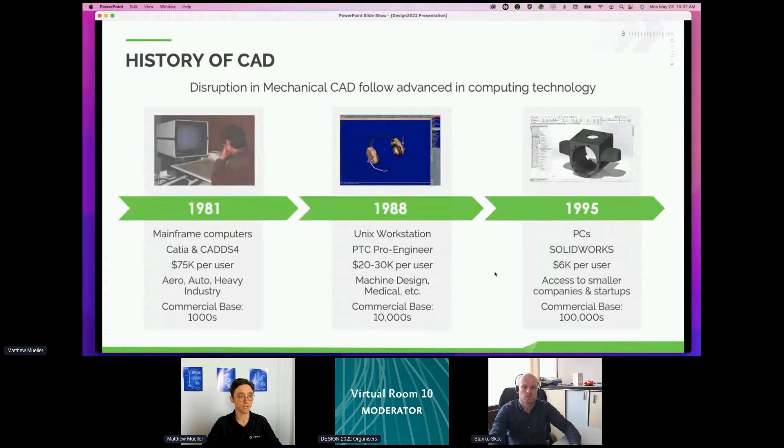But what Onshape is doing is planting a flag in the ground, saying this is the fourth tech disruption. Onshape was founded in 2012, first publicly released in 2015, following the new advance in the availability of cloud computing.

Onshape has lowered the cost significantly in how available CAD is and made it useful for everyone, students, engineers, and development teams that go beyond just engineers, marketing, all different aspects, different members of the development team can now have access to CAD. It's expanded the commercial base by an order of magnitude. We have almost 2 million just teachers and students using Onshape, which is a pretty staggering fact.

So in order to understand how Onshape is fundamentally different, I like to give a little peek under the hood. I'm going to get a little bit technical, but hopefully just to show what is different.

Traditionally, with the state of CAD today, each application is downloaded on a powerful workstation, and you need a computer with certain minimum specifications to be able to run the graphics and do all the processing. And when collaborating with a team of engineers or developers, you have to figure out some way of coordinating each of the files that you're working on with the CADs.

Typically there's some central file system that you have to check in and check out files as each person is working on them. We're seeing a movement in the industry where these traditional CAD companies are adding a cloud component to it. There's a couple of ways that we're seeing cloud-enabled CAD come to market.

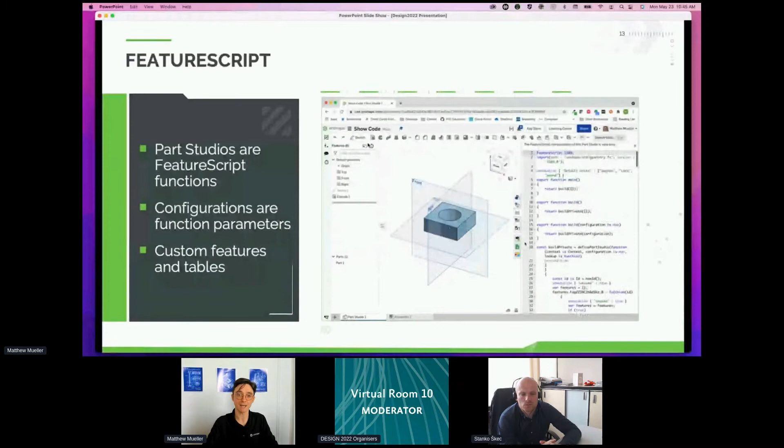So unlike other CAD systems where you can create macros, which are essentially recording a series of features in a row, you can create your own feature that is a first-class citizen in Onshape and works exactly the same as a sketch, extrude. And actually the library of FeatureScript code that defines these standard functions you see in the toolbar is fully open source, MIT licensed. Anyone can open that document and create their own customized version of an extrude to optimize their workflows.

So because of these core architectural decisions, Onshape has product data management, or PDM, innately built into the platform. You can link documents, you can link parts and geometries from one document to another without worrying about files. You don't have to worry about having the right updated version of your CAD application and, oh, the file was saved in an old version, has to be updated. All of the parts are just data in the cloud and can be seamlessly linked in very flexible, extensible ways.

You have role-based permissions that can be changed in real time, and you can limit those based on what the use case is to protect intellectual property or create open source designs that anyone can collaborate on. And then we also have release management built in directly to the Onshape platform. So these are some of the kinds of practices that are important for students to understand and have competencies in when they're going into industry.

And in the past with other systems, the technology just got in the way. It was so hard for students to actually engage in a release management workflow, but now it's just built into Onshape and it just works. The technology gets out of the way.

Another huge opportunity, and we're not going to go too into this unless there's questions at the end, is the Onshape REST API. So for those unfamiliar, REST API stands for Representational State Transfer Application Programming Interface. And this is a wide standard that's used by almost any cloud-connected device these days. And it allows you to access Onshape's engine, the geometry server, the modeling server, directly with any computational workflow.

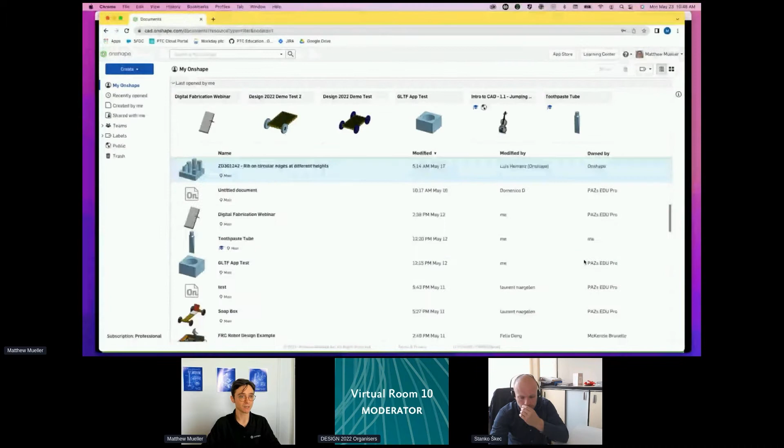And then I'll show configurations, another piece of CAD modeling, which is a very important competency, but traditionally has been very difficult for students to engage with because technology gets in the way. So with that, I will hop over into Onshape. So here I am in Onshape. This is what it looks like when you sign into cad.onshape.com.

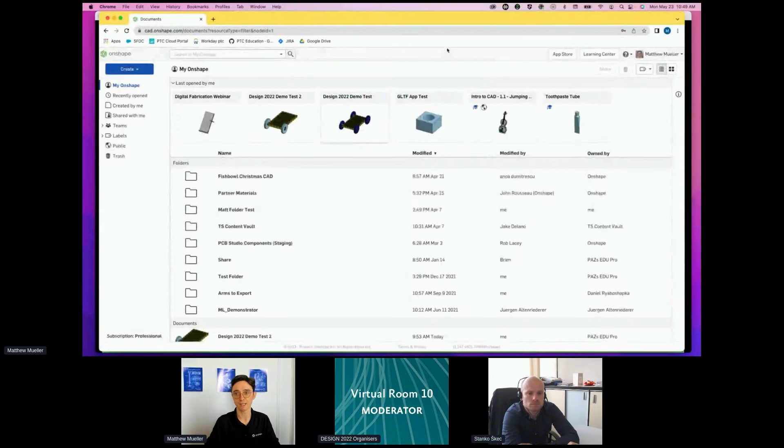And here in the top left, I can click create and create a new document. So Onshape is a little bit different in that you don't create a file, you create a document, and all of your design elements can live within one document. So I'll call this Design 2022 Lego Truck. And that's what we're going to be making, a Lego truck, because we only have 15 minutes, and hopefully you can extrapolate with the basic concepts here into how you can use Onshape to make a real truck if you had more than 15 minutes.

So when you create a new document, you start with a part studio where you model your parts with a feature list, and then you have an assembly. So traditionally you start by modeling parts, but here I'm actually going to start right in an assembly. And I'm going to insert some parts. So I'll start by inserting. You'll see the first thing that shows up is my current document. I don't have any parts in my current document, but I can actually go to other documents.

And here we can see I can pull a part from any other documents I have in my Onshape, or I can come down and click public, and I can pull a part from any public document that anyone in the Onshape community has shared. So I'll search for Lego Spike Prime, and I'll see all of these documents that have been created. This one is the main one I usually pull from, and I can see there's these full robot assemblies that I can directly import into my new document, or I can come over to Part Studios, and here I will take this big Lego build plate, and I'll add that. That will be kind of the main chassis of our Lego truck.

Now, this is a big document, so it might take a few seconds to load, but that's pretty standard, even if you have an installed CAD application, that it takes a little while sometimes for the program to think. And of course, as I'm sharing my screen and streaming a video call, it can take a little bit longer with the bandwidth.

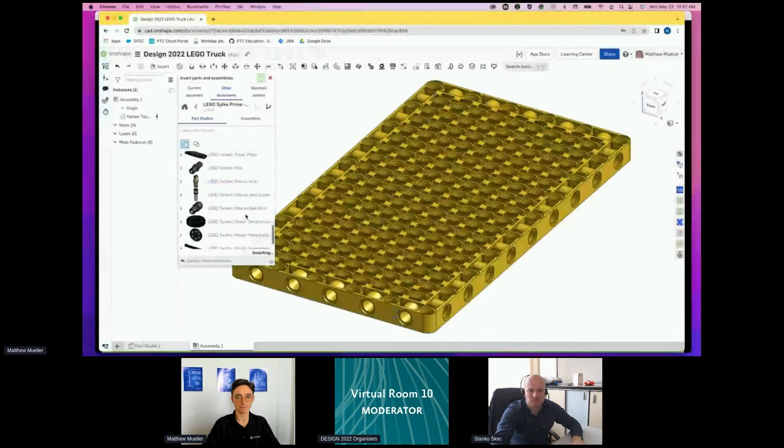There we go. So there's the chassis of my Lego truck, and I can click check to insert that. And once it commits, there we go. So there's the chassis of my Lego truck. And once it's loaded, it's loaded. So now I have a very responsive interface that I can move around and work with freely.

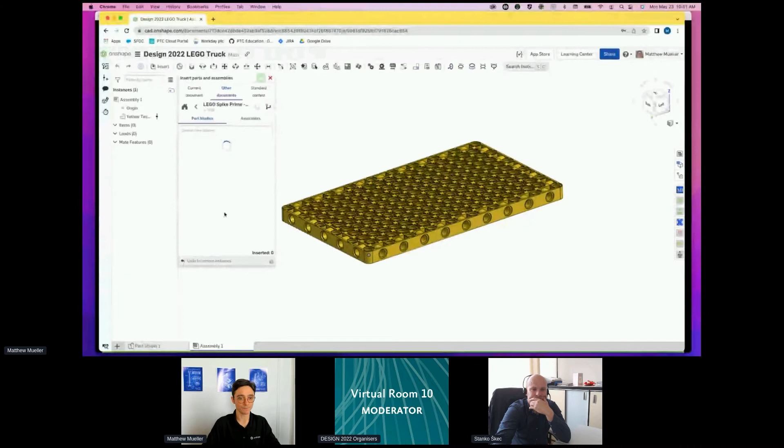So I'm going to import a couple other parts from that document. I'm going to import a peg that I can add a wheel to. So here I'll come down and find the peg here. So I'll take this Technic pin with axle, and I'll insert that into the assembly. There we go. And then I'll insert one more part at the same time.

And this document, the creator did a great job of creating the full set of Spike Prime parts in this one document. And we're seeing FIRST robotics teams take a lot of advantage of this in designing their Vex robots or other types of robots in real time. So here I'll take this white wheel, I'll insert it, and there we go.

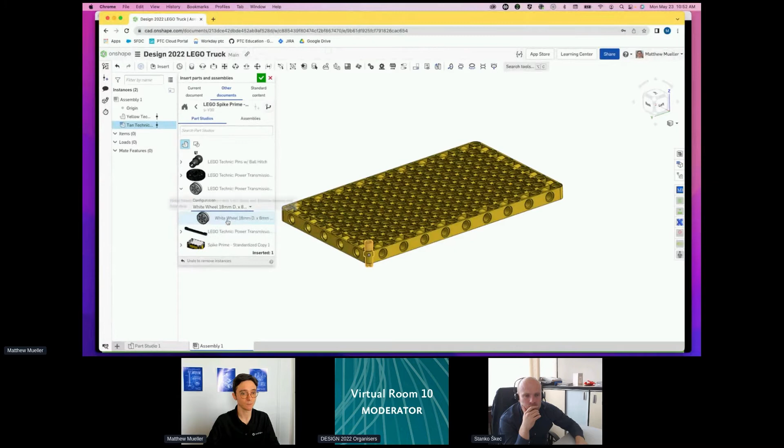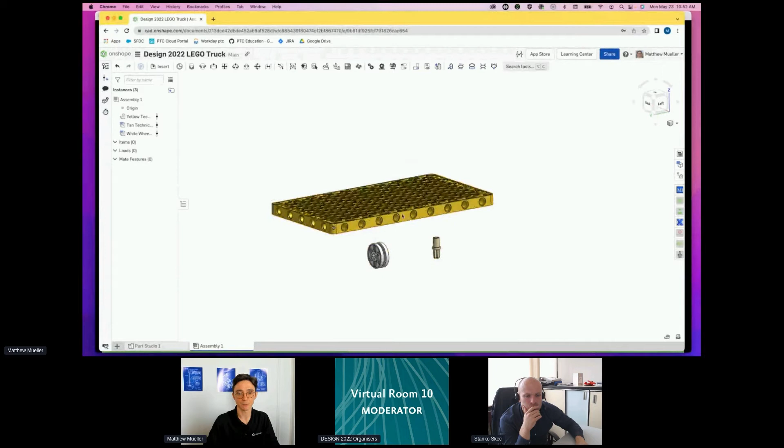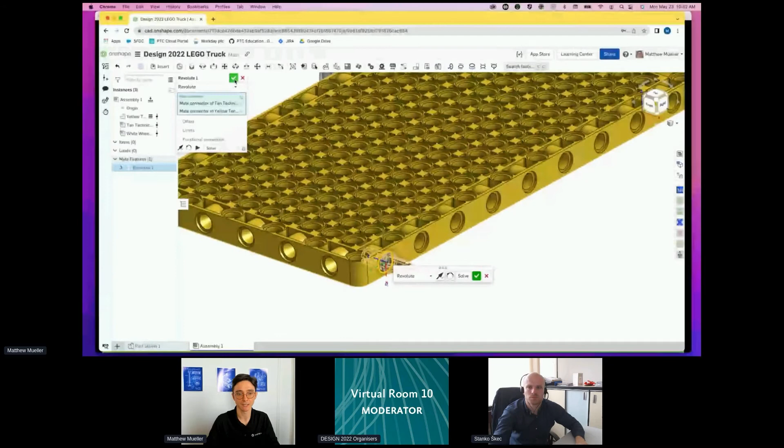Okay, so now I have my 3 parts that will be the start of my design. Maybe I will start by fixing my chassis so it will stay in one place. And then I can start using these mate connectors to create my assembly. So I will create a revolute mate between that pin and here. I'll make sure it's oriented in the correct way. And I'll click check. So now we have my pin in the correct place. Hopefully everyone's played a little bit with Legos and knows the general idea of how Lego works.

Now we can fasten this wheel onto the axle here. Again, we'll make sure it's pointing in the correct direction and click check. So there we go. We have the start of our Lego truck here. Now, again, I've not modeled anything from scratch in this Onshape document. I've only been pulling from other places.

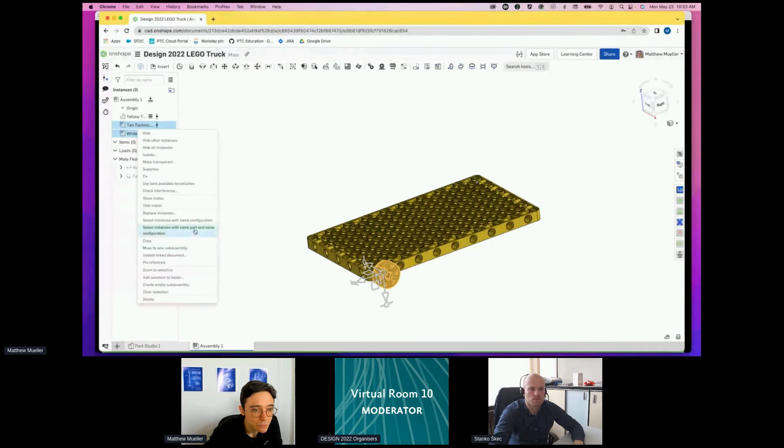But what I can do, because I know I'm going to want to make more than one of these wheels, is I can right-click on these 2 parts, and I can create a new subassembly from these 2 parts. And move to new subassembly. So there we go. We see them collapse in here, and we see this new assembly appeared in my document. So you can have as many assemblies or part studios as you want within one document. And again, you can seamlessly link these part data between documents, which is a really powerful way of modeling.

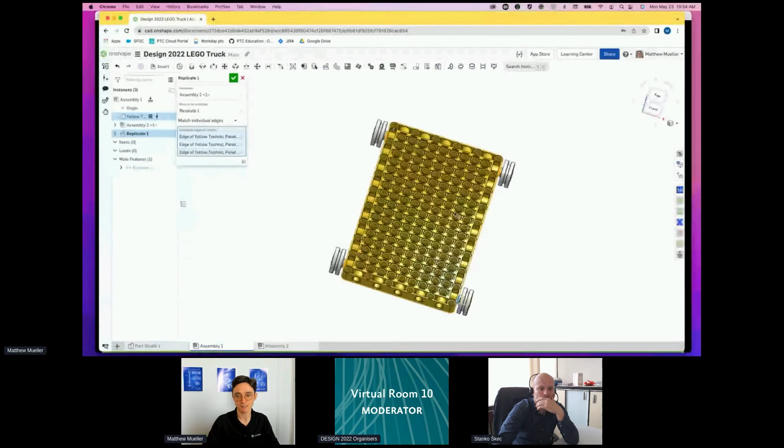So now let's make sure that we have 4 wheels so I can replicate this assembly instance. And I will select match individual edges, and I can click the 4 edges on the corners of this chassis here. And there I have my 4 wheels. So we have the start of a car. And now what's a car without tires, right? So now we can get into the fun part, which is actually creating a model.

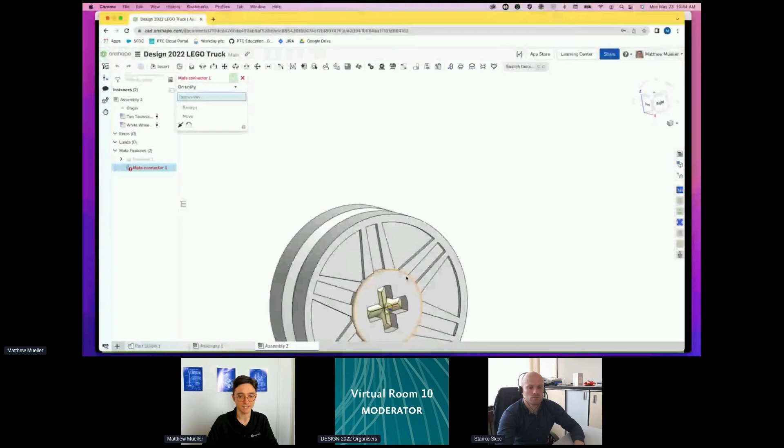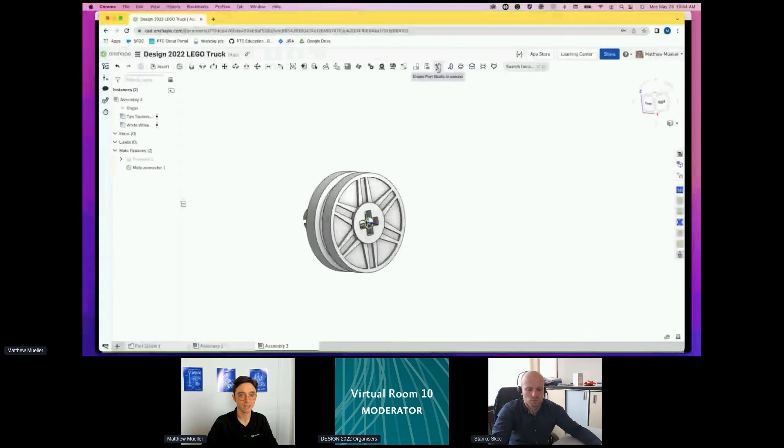And one of the very exciting things that Onshape allows is you to model in context. So I want to create a tire for this wheel in particular. So why not create it in the context of this assembly? So I created this mate connector, which will be the origin of my tire. So now I can select create part studio in context. It asks me to select the origin mate connector for my new part studio. So I'll select that mate connector here.

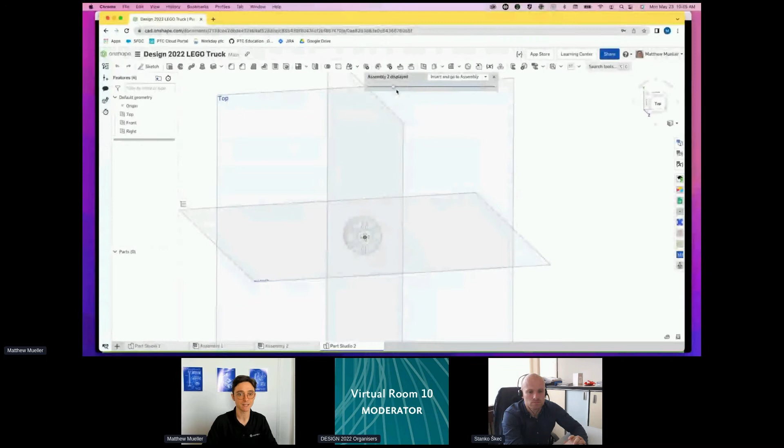And when I click check, again, we see a new part studio has just appeared in my document, all within this same container. So now we see there's this kind of translucent assembly in the background. I see assembly 2 is displayed, and I can change that transparency if I want. But this is a brand new part studio, no features. So as with all CAD, we start with a sketch. I'll create it on the top plane, go normal.

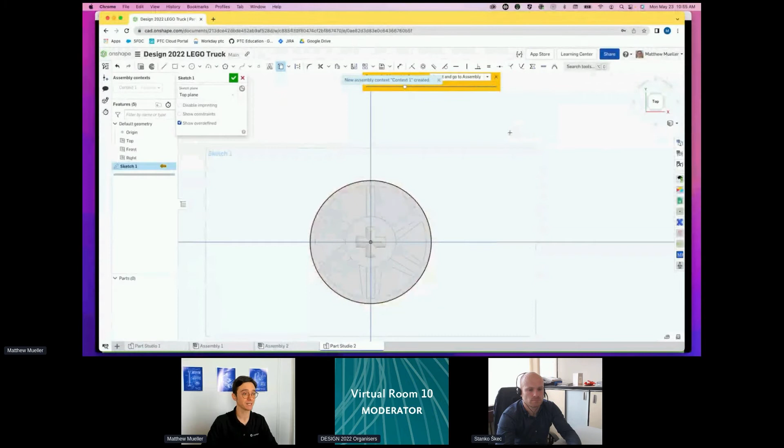And I can actually pull entities into this sketch from my assembly. So this is the use feature in Onshape, and I can just click this edge. I don't even know what the dimension is, but I know that it's the exact right dimension because I trust whoever modeled that Lego part made the right size. And then I can also create another circle, and maybe I'll dimension the outside here, and I'll create a variable in this case, and I'll say tire diameter. And we'll start with a 2-inch tire diameter. That seems about right for a Lego truck.

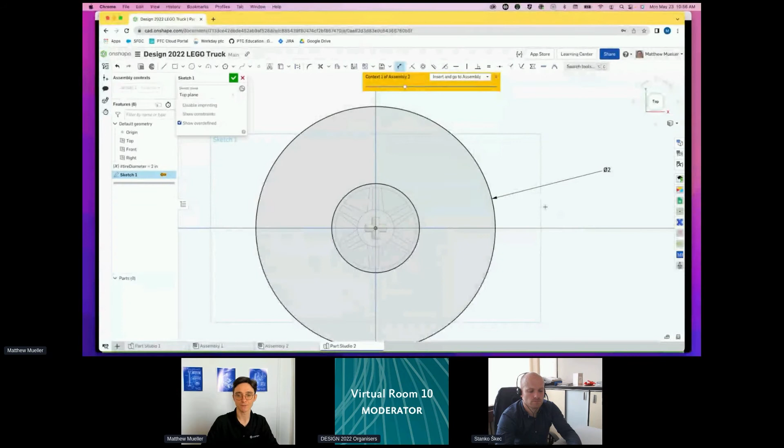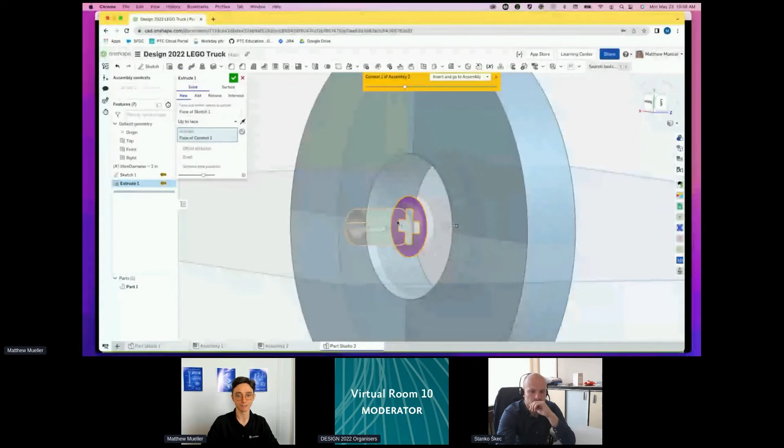And this is a great way of making sure your design is very parametric and flexible based on what you want. So now, as with most CAD models, I can extrude it to go from 2 dimensions into 3 dimensions. And again, rather than having to look up the specification for how big this wheel is, I can use the context of that wheel to make sure that the tire is exactly the right thickness to go around the wheel. So there we go. I have the start of my tire.

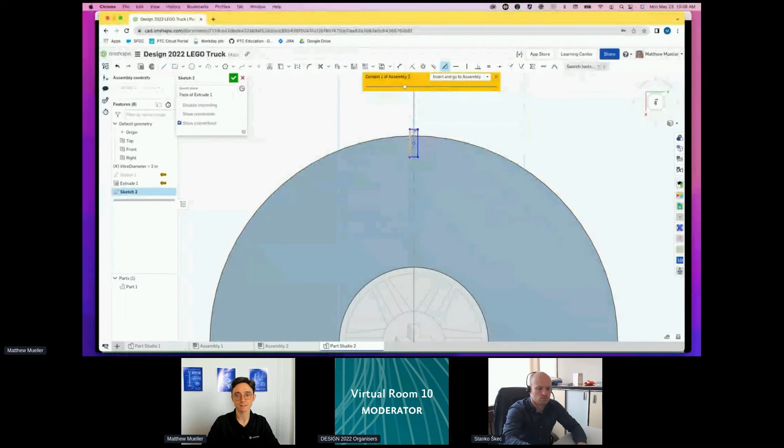And then last but not least, let's create some tread so the tire has some grip on the ground. So I'll create a sketch on this face. I'll create a little rectangle, make sure that it's properly constrained to the edge here. And I'll just choose a pretty arbitrary size to start with. So there's my sketch. And now I can extrude, remove this part of the sketch to create a cutout. That will be the first part of my tread.

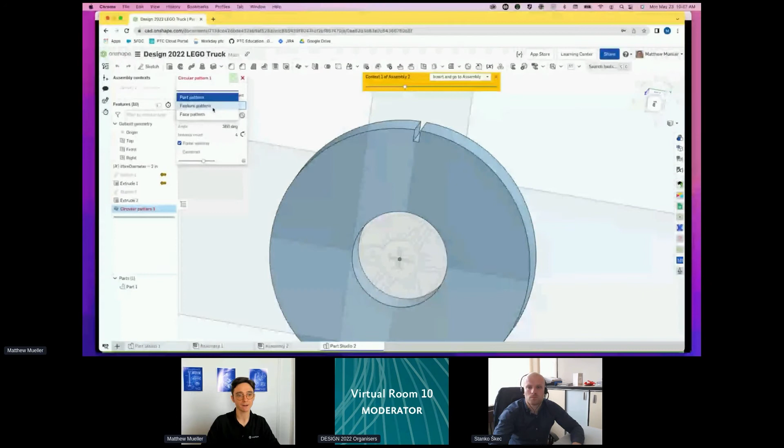And then last but not least, I will create a feature pattern. So I'll come over here, find the circular pattern. And rather than create a part pattern, I'll create a feature pattern. And I'll select this extrude 2. I'll select the edge of the tire to be the axis of my pattern. And maybe let's start with 30 cutouts to be the start of my tire. So I can click check, and that looks like a good start to the tire.

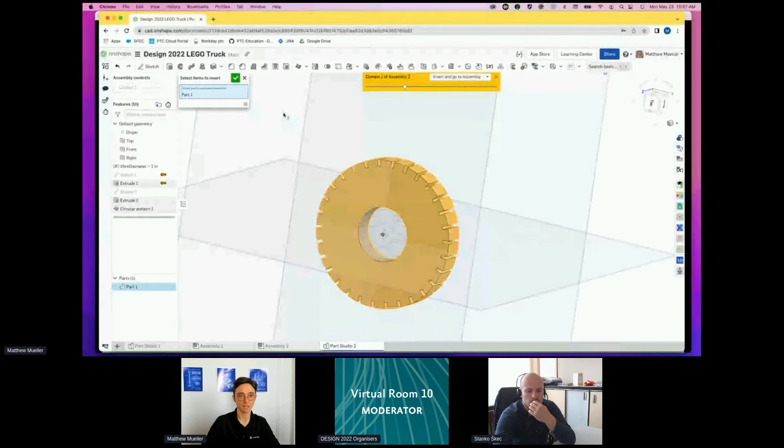So I can click here, insert, and go to assembly. I'll insert part 1. And of course, if I was following best practices, I would rename my parts as I went. So maybe I'll do that. So I can right-click on part 1, rename it, call it tire.

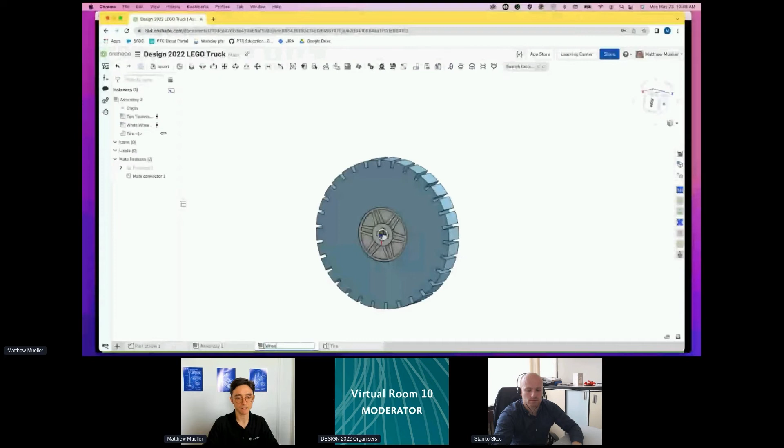And I could even rename this part studio and call it the tire part studio. Here, maybe I'll rename this assembly 2 to be wheel sub assembly. And the last thing I need to do is mate the tire to the wheel, because we haven't done that yet. So I'll select the tire and I'll select the wheel. Now they are fastened together.

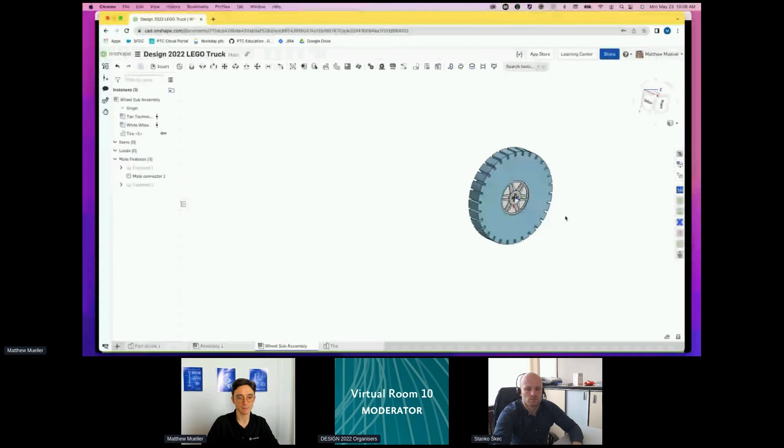And immediately when I come into my assembly 1, I see all of these changes have instantaneously propagated through the design because we're working off a single source of truth. Everything works in real time.

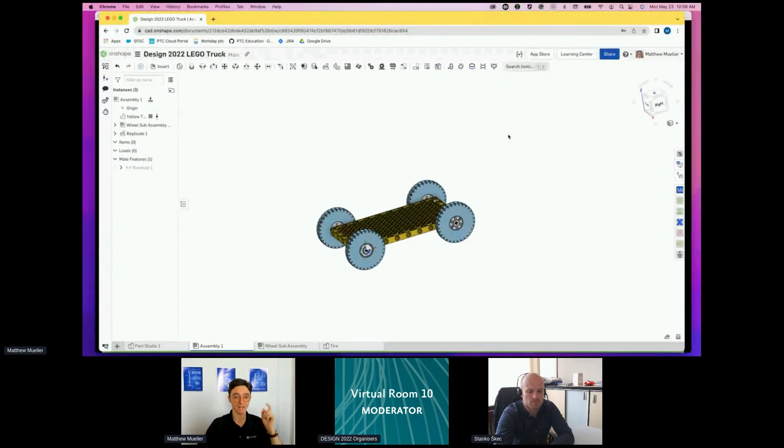I see one question has come in about compatibility with different computers. Again, it all works on the internet, so no compatibility issues. It's all just data in the cloud. So as long as you have an internet connection, you can edit in real time on an iPad, on an iPhone. It all just works.

Maybe I'll take a quick pause. Everything coming across clearly so far? Okay. I believe so, yeah.

Great. So this is kind of the data management part of the demonstration. I wanted to show that everything just works. It propagates through in real time. You can link parts from other documents and model assemblies with other parts very easily. And now we're going to get into the collaboration part.

So here I'm going to share this document with my colleague Alex, who's standing by. And as soon as I click share, and again, I can select all of these different permissions. So you can be as restrictive or available as you want them to be. And Alex should have just gotten an email, and in a second, I suspect I'll see him pop into this document. And I can add a comment here.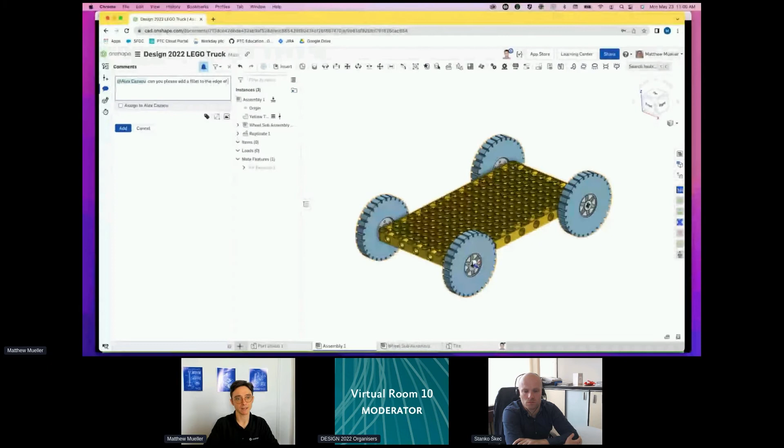I can say, Alex, can you please add a fillet to the edge of the tire? And maybe what I'll also do is come into the tire here, and I'll tag an entity. So I'll say it's this edge of the tire. I want to make sure he knows what we're working on, and I can assign that to Alex.

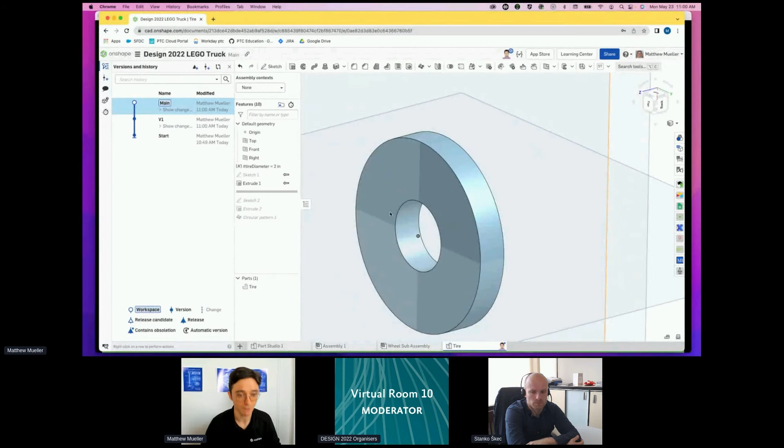Now I'm going to come over here. I'm going to create a version. So everything is very version controlled in Onshape, just like GitHub. And I'm a busy guy. I want to take full advantage of the engineering team. So as Alex is getting in here and starting to work on that, I can create a branch and start to work on my own on a new thing.

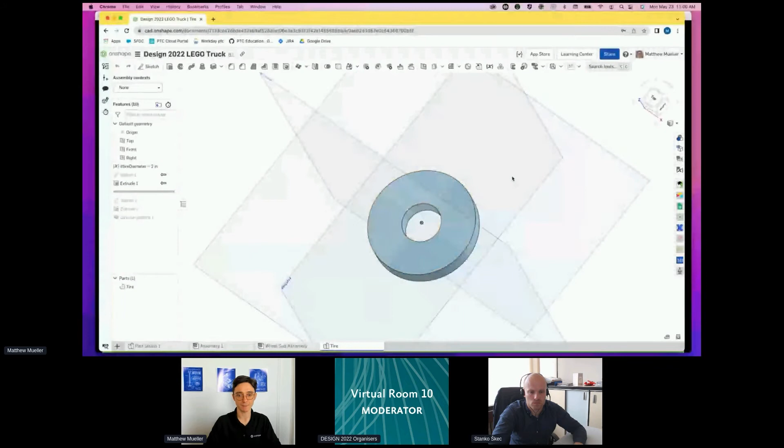So Alex is still in the main workspace here, working on adding those changes. And I'm here in a new branch, and I can make my own edits without worrying about creating conflicting changes with Alex. So here's my tire.

And the next thing I want to show is configurations. So on the right here, I have a configuration panel. I can click Configure Part Studio, and we start with default. And then maybe I'll create a high tread version. And then I will also create a low tread version.

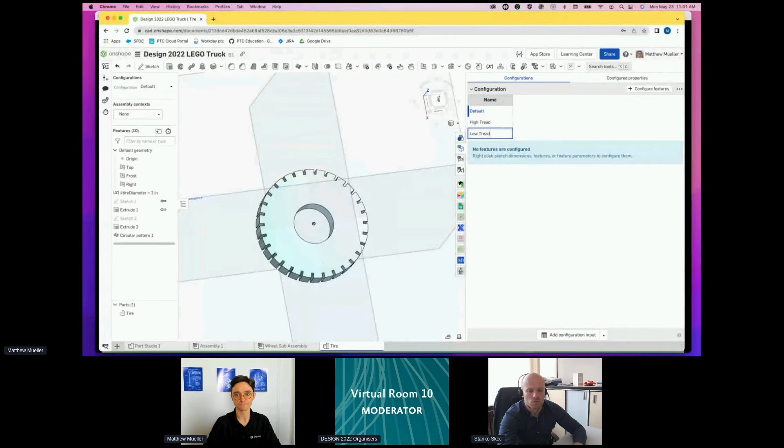And for this configuration option, I can configure a feature, and maybe I'll configure this circular pattern 1, and I'll configure that instance count. So we see this number shows up here, and I'll start with that. So maybe for the high tread version, we have 40 of these pattern cutouts, and for the low tread version, we have 20 of the pattern cutouts.

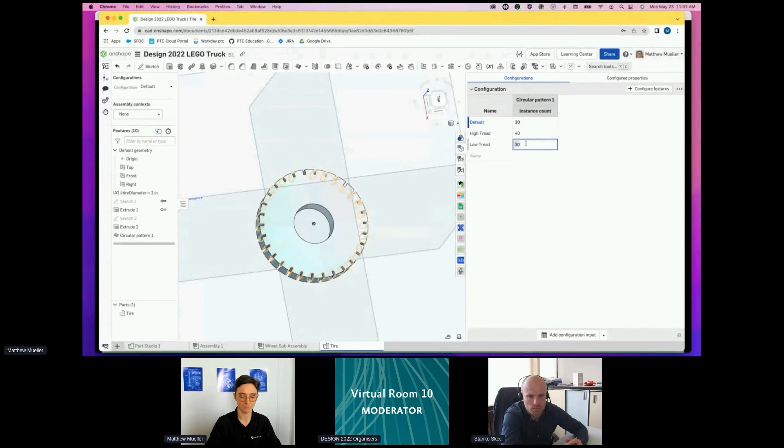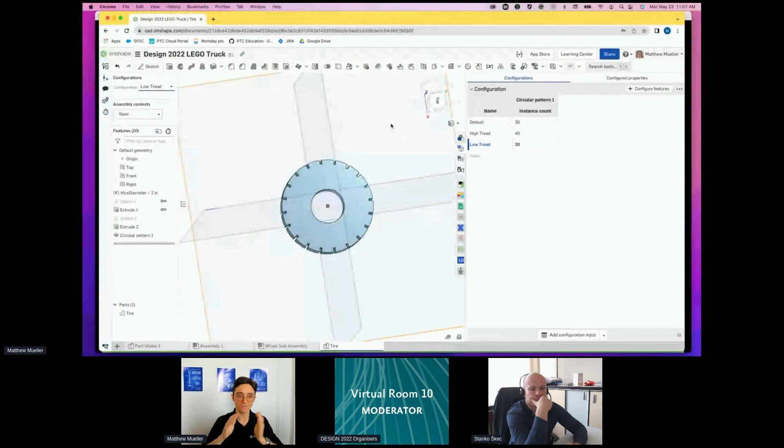So now on the left here, we have this configuration panel that popped up, and I can select high tread, see what that looks like. I can select low tread, see what that looks like. And the powerful part is this is all the same part studio. It's the same feature script function that is made up of these parametric features.

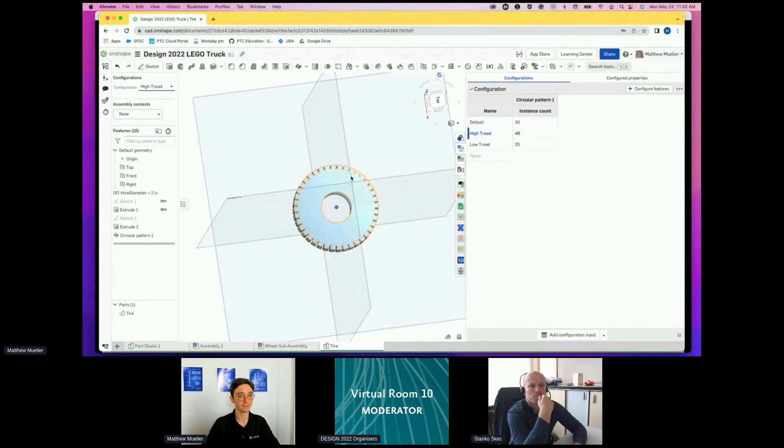And all this configuration is an input to that programming function that generates different parts. So very flexible, very extensible. We can use all of these different parts. All of them exist at the same time, which is hugely powerful. So maybe I'll add one more configuration. This time I'll add a configuration variable instead of a list.

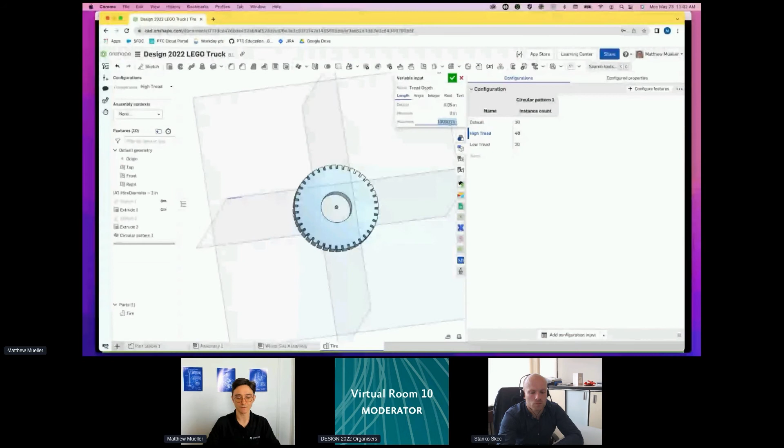And here I'll create a variable called tread depth. And maybe the default will be 0.05 inches, minimum 0 inches, maximum 0.15 inches. And now I have another configuration option shown up here on the left.

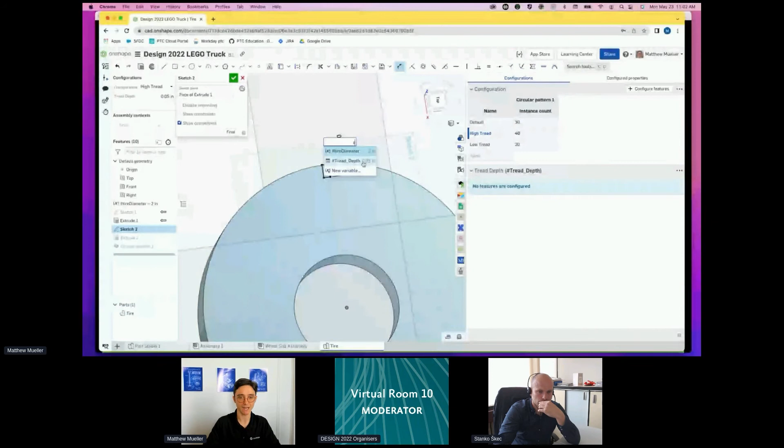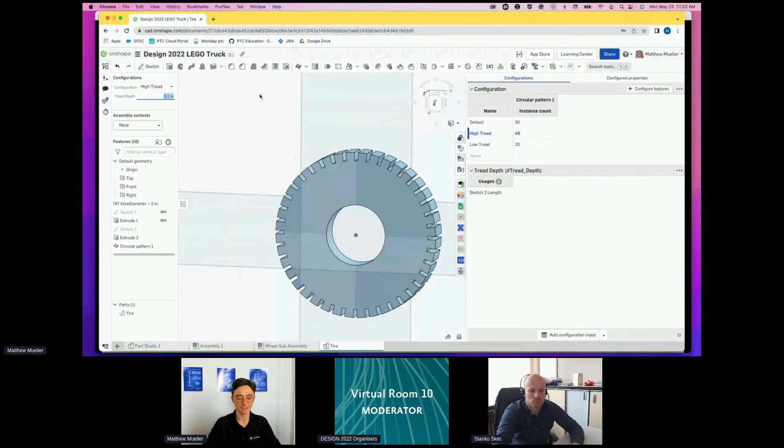And I can edit my Sketch 2, and I can dimension the depth of this with this variable. So I type hashtag and I see all the variables in my workspace, and tread depth is one of my options. So that's the thickness of my tread cutout. And again, I can just change this variable to be a low cutout or a higher cutout. And all of these different versions of the part exist at the same time. They're all just different inputs to my feature script function.

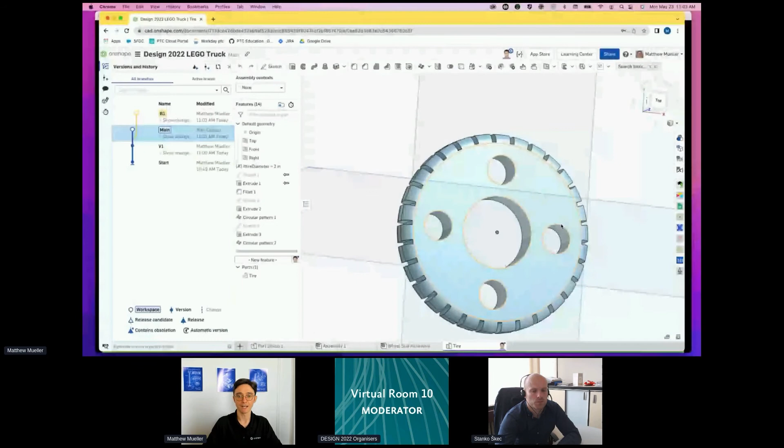So as I've been adding these configurations, we can go back into the main. So I've been working in this branch here. We can go back into the main workspace and see how Alex has been doing, see what progress he's made. So awesome. It looks like he's done some great work and added the fillets, and he's gone even further and added these holes onto the wheel as well to reduce the weight.

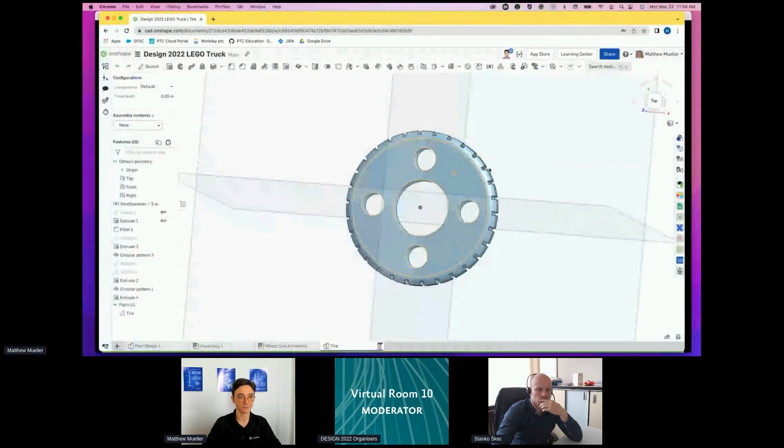So I think I'm ready to take my changes from my branch and merge them in here. So I can right click on my branch and select merge into current workspace. And as long as none of our changes created conflicts, we now have this updated version where I can configure the different tread counts to be high or low. And the tread depth can be 0.1, and it's all a fully configured tire. And we were making those changes in real time.

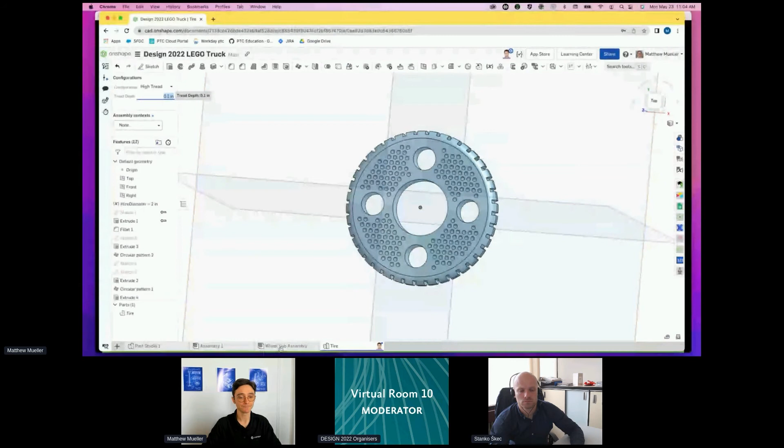And because of this GitHub style workflow, it's an agile product development process. So we were able to work in parallel on different things and then just merge the changes in. And as long as those changes didn't conflict, it just worked. The changes propagated through. So we can come back in, and again, it's a single source of truth. So all those changes have come into Wheel Sub Assembly.

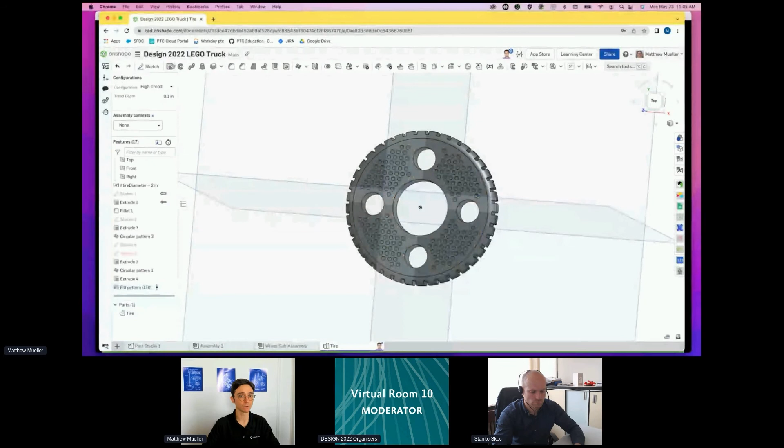I see that Alex has created this fill pattern here. And if we come in, I can see there's this new feature that has showed up, and this fill pattern feature you won't find in the standard library here, because it's what we call a custom feature. So someone had a use case that they wanted to create a lot of these kinds of patterns and created their own custom feature, which is just a normal parametric CAD feature that can be used here.

So all of these changes have come through, and now we have our up-to-date car that was developed in parallel by team members. Alex is based in Romania, I'm based in New York City, and we're still collaborating in real time. If I double click on Alex's icon here, I can, with no hands, see what Alex is seeing in real time. We can do a design review. We can do anything we want by collaborating across the world.

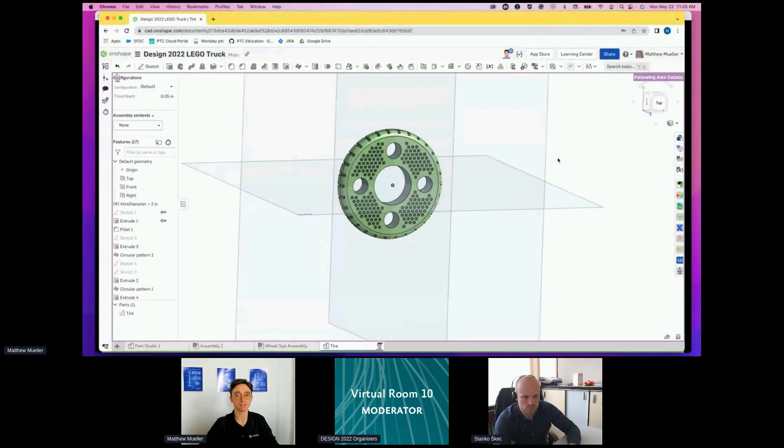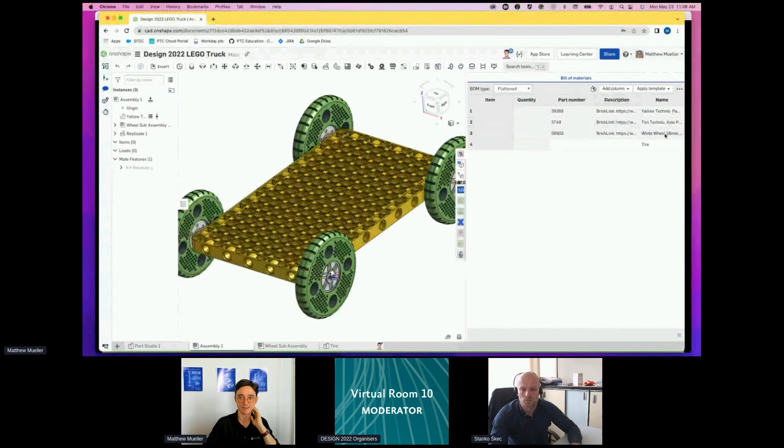So what have we learned? So we touched on how data management is directly built into Onshape, and I realized I wanted to show one other thing. So here Alex is moving the view, and I can see that, but as soon as I take control, we see things like bill of materials. It's just directly built in here, and I can add a column. Let's say I want to add the name of my parts into my bill of materials. Here it is. And the person that created this linked document actually added the link to buy those parts from a Lego library. We see the names of all the parts. So it's all just directly built in.

Collaboration across the world in real time, you can see that single source of truth change. And configurations, this powerful part of how CAD works in industry, students can now engage with so easily. The technology just gets out of the way. So with that, I will yield my time and see if there are any questions.

Thank you, Matthew, for a nice presentation and nice demo. I noticed there are a few questions in chat. So Alexander posed a question: are there any features to create A-class surfaces? So if you could comment on that.

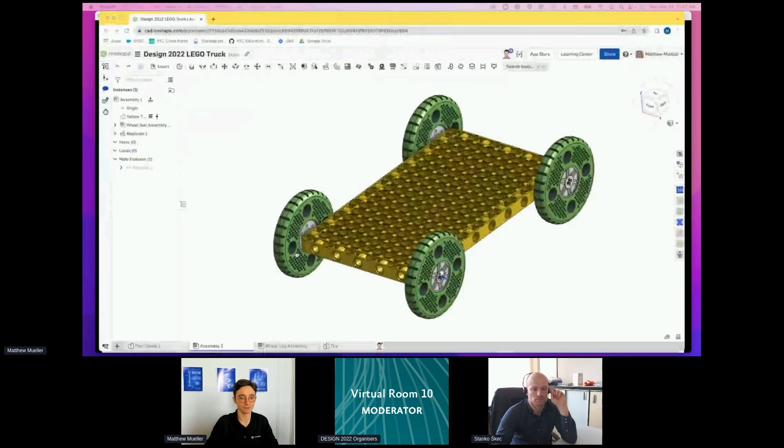Yes. So surface modeling is a first-class part of part modeling in Onshape, and as with all of the other features in the menu, that feature is fully open source. So you can see the code, the feature script code that is used to generate all of these surfacing functions, and create your own version of them.

They are a little bit more involved than the normal kind of solid modeling, but there are other partner applications. So here you can come into applications, and there's an application called PHI that is a great surface modeling interface that is, through the REST API, very seamlessly integrated with Onshape.

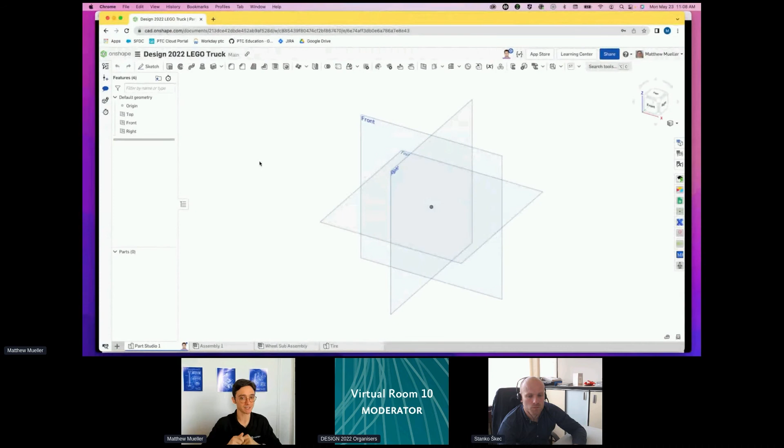Okay, great. Thank you. And one more question from Peter: what are the main differences between Onshape and the approach that Fusion 360 had integrated with the cloud?

Great question, one of my favorites actually. Fusion 360 uses a thick client approach, where you still need to download and install Fusion 360 on your computer if you want to edit the model. They have a web viewer so you can see the model in the browser, but you can't actually edit it there. Fusion 360 also doesn't have the same built-in data management capabilities, real-time collaboration, or Feature Script to create first-class parametric features. So it really is fundamentally different.

We like to say that Fusion 360 is cloud-enabled, but it's not cloud-native. They had this CAD application and integrated it with the cloud, but they didn't build it with the cloud in mind from the start.

Thank you once again. So I have one question for you, Matthew. Since there are plenty of researchers among participants of this session, I'd like to ask if you could provide more details about Onshape analytics. I think there are many strengths Onshape offers, especially for design researchers who are interested to analyze how people collaborate and work during the design process using CAD. Could you explain that a bit more?

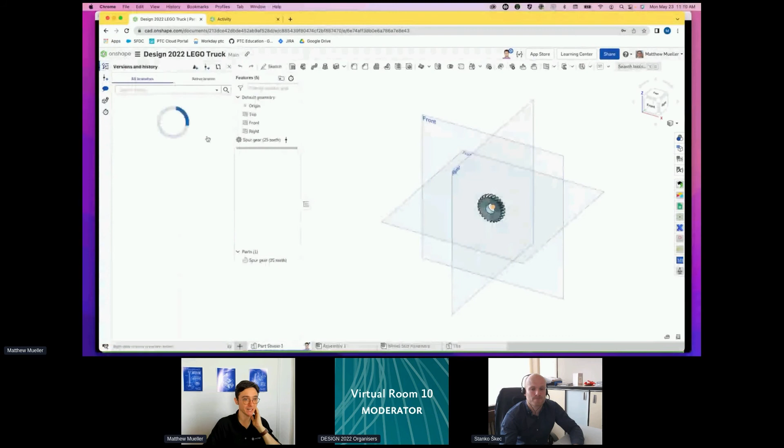Yes. So as Stanko mentioned, because of Onshape's cloud-native architecture, we see every change that's made to the document. I can come back to any individual part or any individual edit that was made at any point in time. This goes back infinitely. I can go back to the first insert of a part that I did. Each change is saved as a micro version.

And this is part of that append-only database architecture. This means we can track who is making changes, what kinds of changes they're making, and aggregate those in analytics. You can track all sorts of things, but one limitation is you can only access that as a user through an enterprise, and there's an EDU enterprise option. If you're interested, please reach out—a couple of my colleagues, Bernard and Alex, can help with that. I see Bernard just put a link there.

Thank you. So with an EDU enterprise, you get a new domain, which has a number of advantages. You can use single sign-on for your students, but one of the advantages is access to this analytics. So you can come and see my activity—I can see, as a designer, what I've done over time, which documents I've worked on, what types of edits I've made. We could see my top 10 most active documents, all that kind of stuff.

Over time, we can see—let's see what filters we have now. One of the main ways researchers are starting to take advantage of these analytics is through the audit trail, which is every single change that's been made to any document within the enterprise. You can see all of those changes and who is making them based on the time, and you can export this as a CSV and do some very exciting analytics to understand how students are learning, or how professional design teams are collaborating in real time. That's a very powerful way researchers are starting to leverage Onshape's cloud-native architecture.

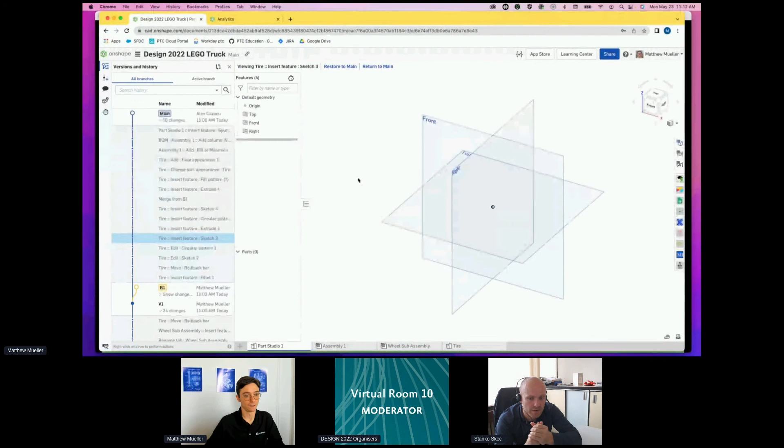At a certain point you will possibly see some reduction in performance, but there's no real limit. The main limit really is in multiple people editing documents at the same time. If you just want people to view the document, I can put the link to this document in the chat here, and that's a view-only version. Anyone can click on that, and even if you're not signed into Onshape, you can click through the tabs, manipulate, move around the model, and see everything that's there.

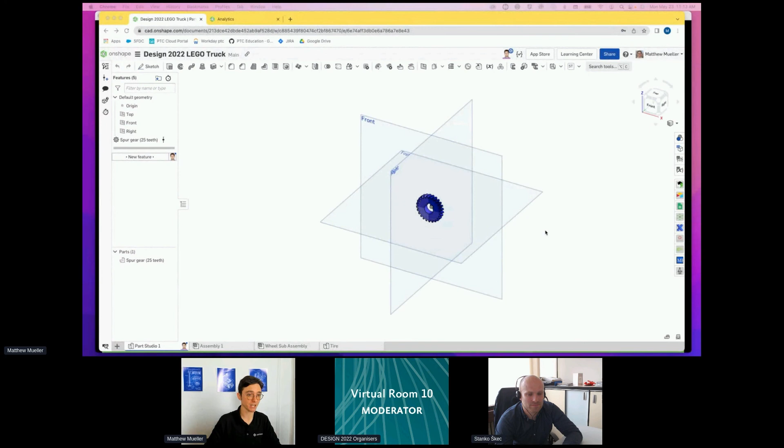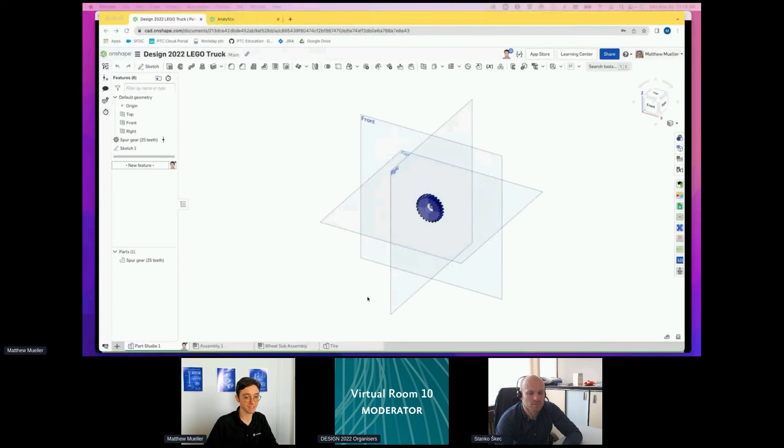Again, if you want 200 plus students in the same document all editing it, there will probably be a slight reduction in performance. But there are other best practices for optimizing the performance of your designs, like distributing parts among different documents and linking the parts between documents. And if you're getting to the level of big assemblies, we can certainly work with you to make sure the performance stays optimal.

Okay, great. So we have one more question from Professor McAloone. He asked about integration of designs for sustainability plugins and tools, for example LCA, life cycle assessment, material selection, etc. Do you have some types of these sustainability plugins and tools integrated already in Onshape?

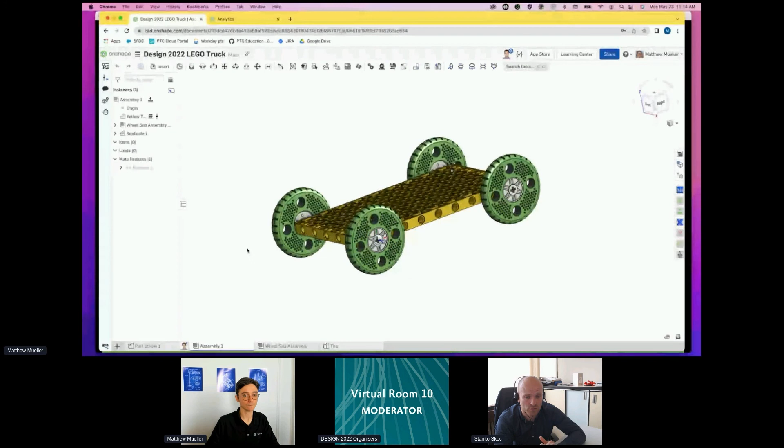The short answer would be yes, I'm sure they are available here. Here what I just clicked on was the App Store, and you can see all of these are first-class citizens of Onshape. They integrate with Onshape's REST API, and I'm very confident there are some sorts of sustainability analyses or manufacturing kinds of applications that can help you understand those things.

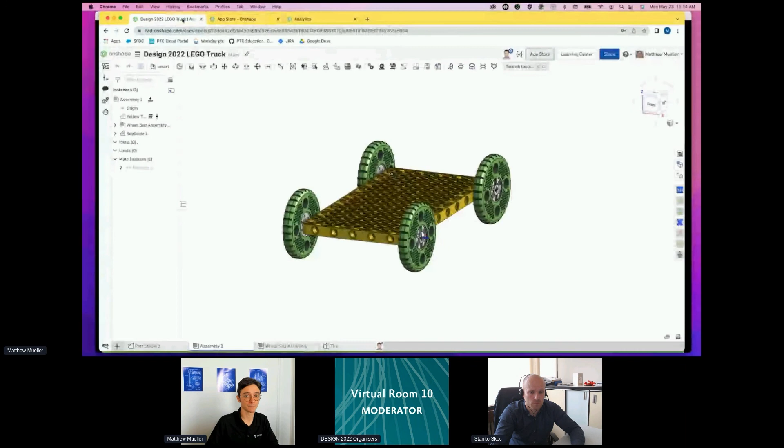But beyond that, because you can access the geometry in real time through the REST API, you can do your own customized analysis. You could even do that with a custom feature in FeatureScript to understand the mass properties, the material choice, any of that. And it all leverages that same cloud native architecture. So if exactly what you're looking for isn't there right now, it's easy to create that first-class citizen integration through FeatureScript or the REST API.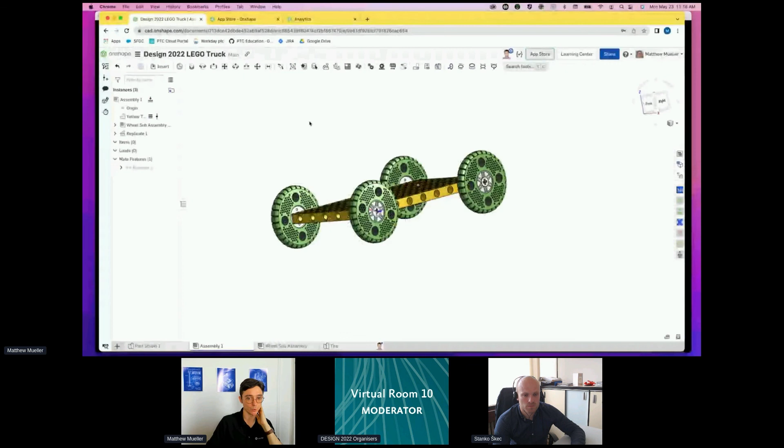As Onshape creates and develops more integrated functionality for simulation and rendering, we are eager to try and provide that for education users. Of course, with the almost million active education users, we have to consider the scalability of resources. But we certainly, as Onshape continues to be developed, will look towards providing all of the functionality we can to education users. Again, I emphasize there are solutions readily available and free for you to use right now through the App Store.

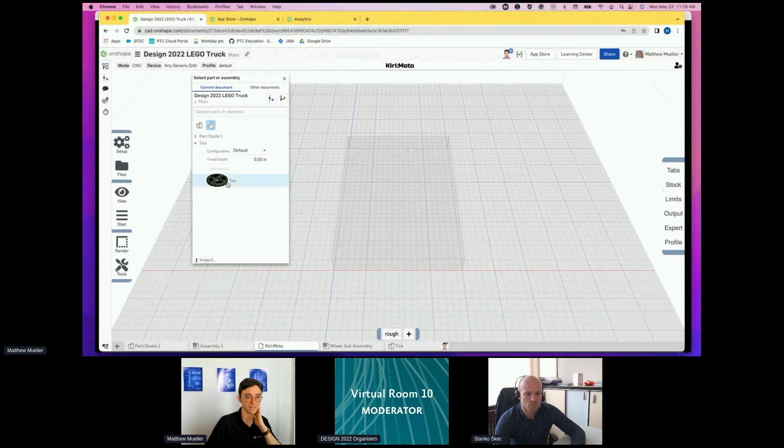So maybe a super quick example is if you're looking to do digital fabrication, there's this application called Kiri:Moto, which just shows up as another tab in your Onshape document, and you can import your parts directly without worrying about any changes, and generate your CNC toolpath or 3D printing. But of course, you can export the part and bring it into any third-party application you want.

A long answer to a short question.